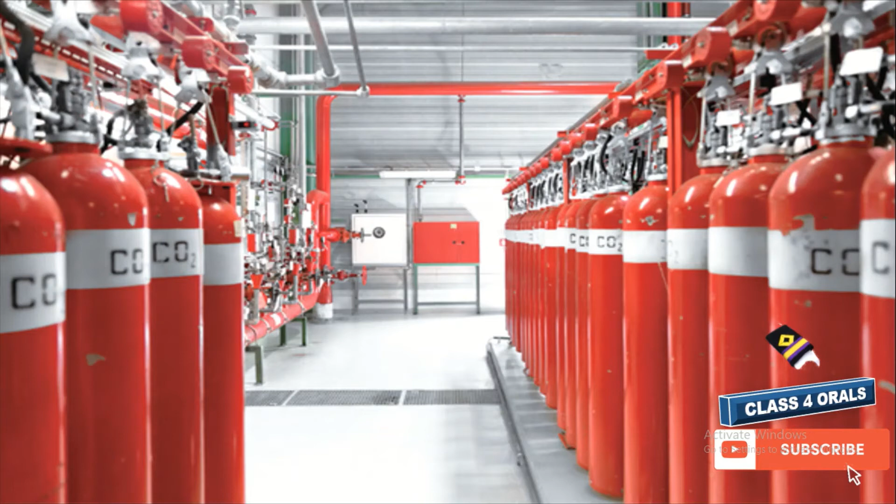Today we are discussing the fixed CO2 firefighting system maintenance and inspection as per the DG shipping. Please find the DG shipping circular link in the description below, because the video is going to be from this PDF.

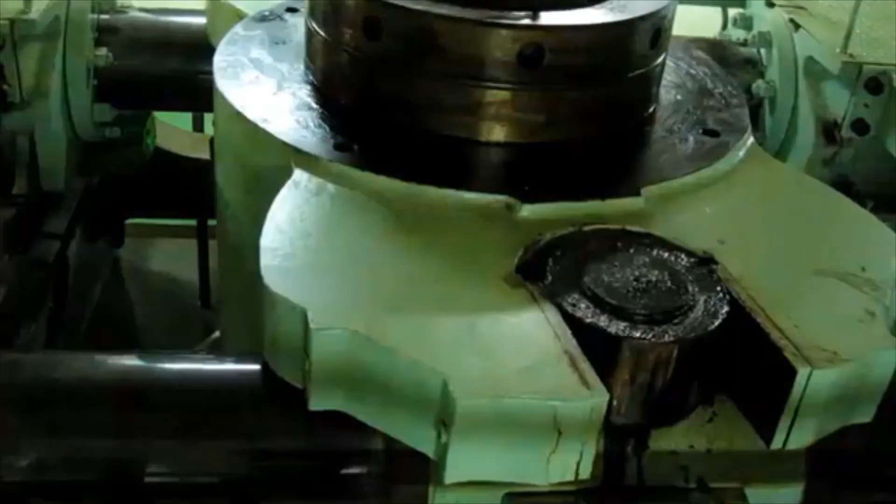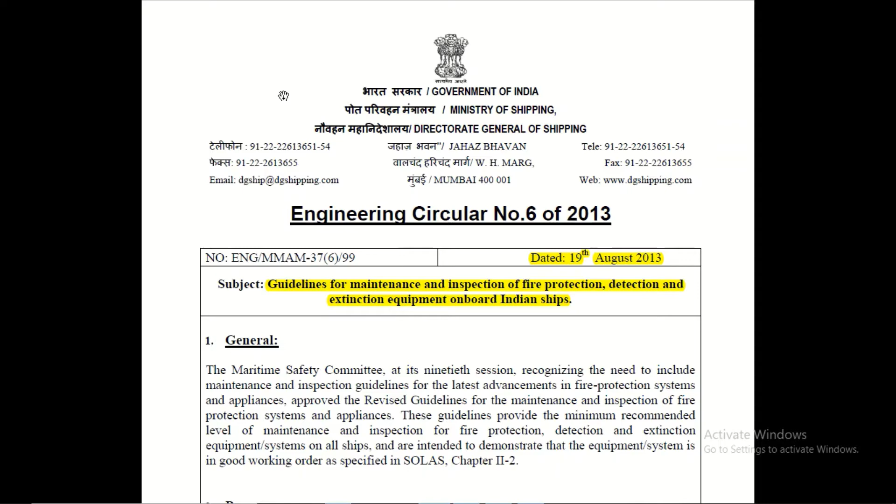Here we can see the engineering circular by the DG shipping dated 19th of August 2013. It reads the guidelines for maintenance and inspection of fire protection, detection and extinction equipment on board Indian ships. Please note this guideline is for the Indian ships because it is given by the DG shipping.

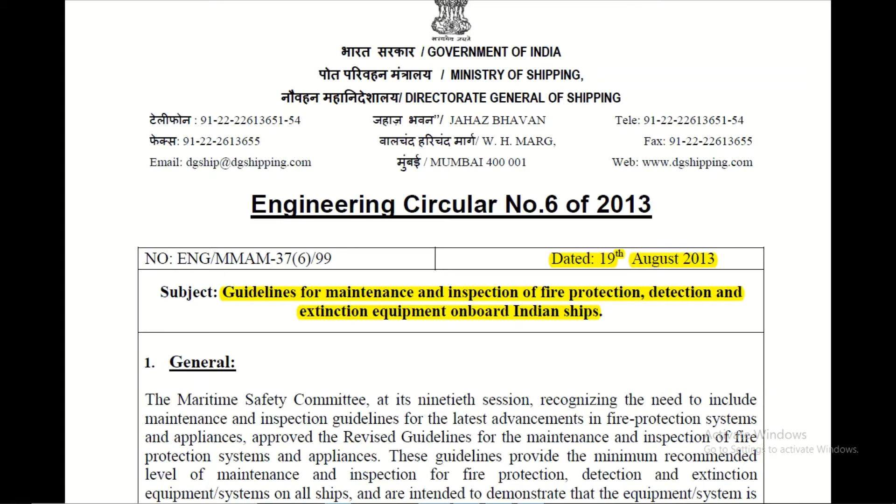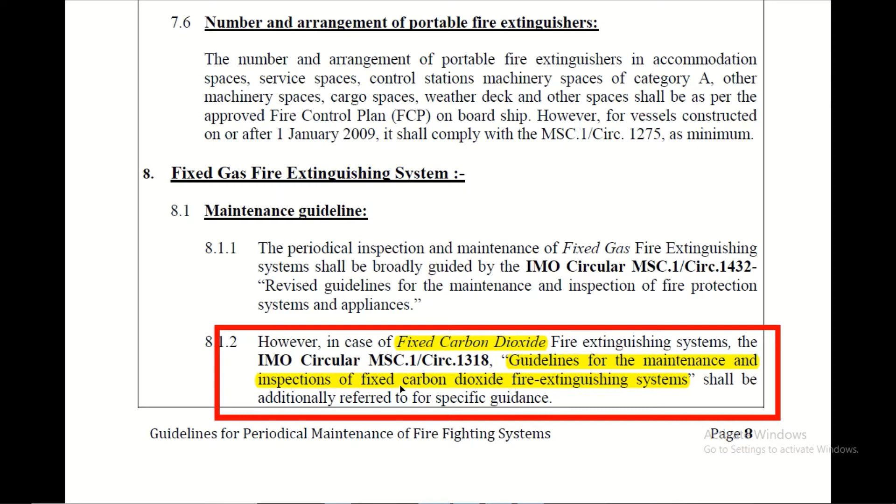So let's quickly discuss what are the points which DG shipping is saying us to follow for the fixed CO2 firefighting system. As we can see under section 8, that is for the fixed gas firefighting system, it comes under the IMO circular MSC.1 circular 1318. Again, I can read for you: the guidelines for the maintenance and inspection of fixed carbon dioxide fire-extinguishing system shall additionally be referred for the specific guidance.

So let us quickly discuss what are the weekly, monthly, quarterly and annual inspection and maintenance. First point says, under these maintenance, there shall be assurance that for all the systems of fixed gas fire extinguishing system, including the fixed CO2 system, there should be approved maintenance instructions that should be performed by the competent crew members.

There should be competent crew members performing the maintenance and not the junior or trainees. The second point says the additional periodic inspections and maintenance under circular 1318 shall be undertaken by persons specially trained and under authorized service agency of the CO2 systems only. Suppose you have a Unitor CO2 system, then the periodic inspections and maintenance should be done by those people under the Unitor fixed CO2 systems.

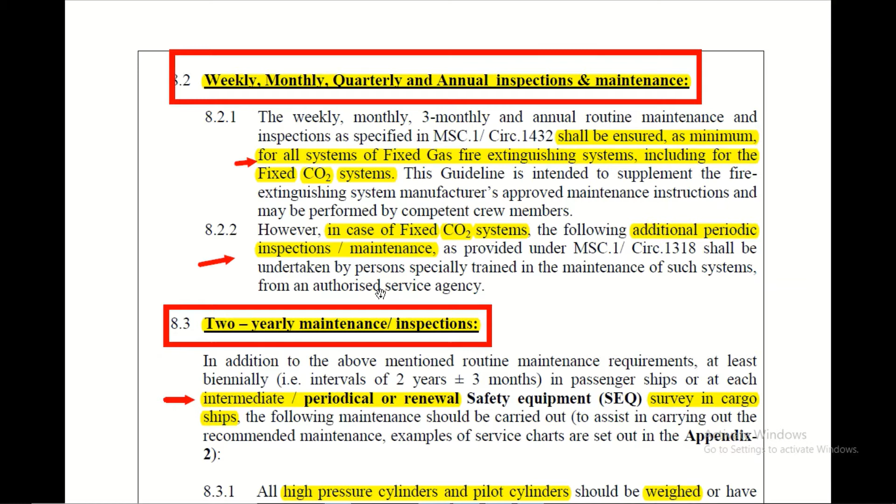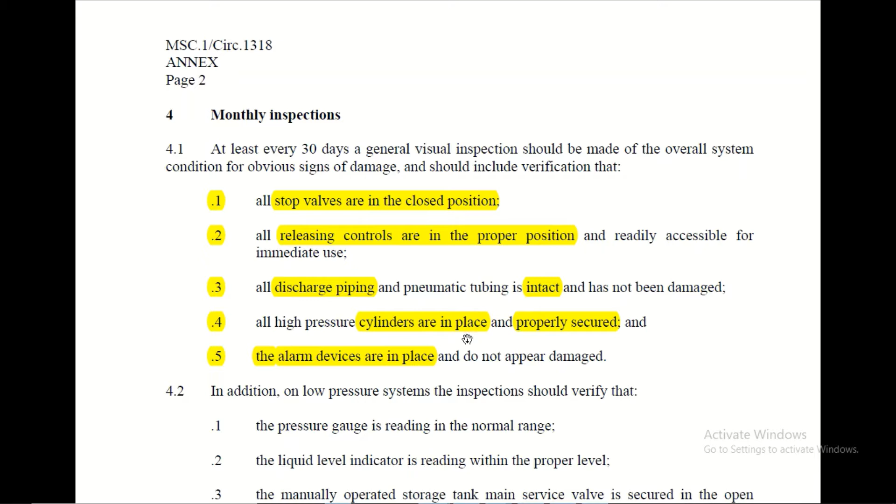This is IMO MSC circular 1318 which we have talked about just now. It has the monthly inspection list that every 30 days a general visual inspection should be made. The first point is all stop valves should be in the closed position. All releasing controls are in proper position. All the discharge piping and pneumatic tubing should be intact and not damaged. All high pressure cylinders are in place and properly secured by the clamps. All the alarm devices are in place.

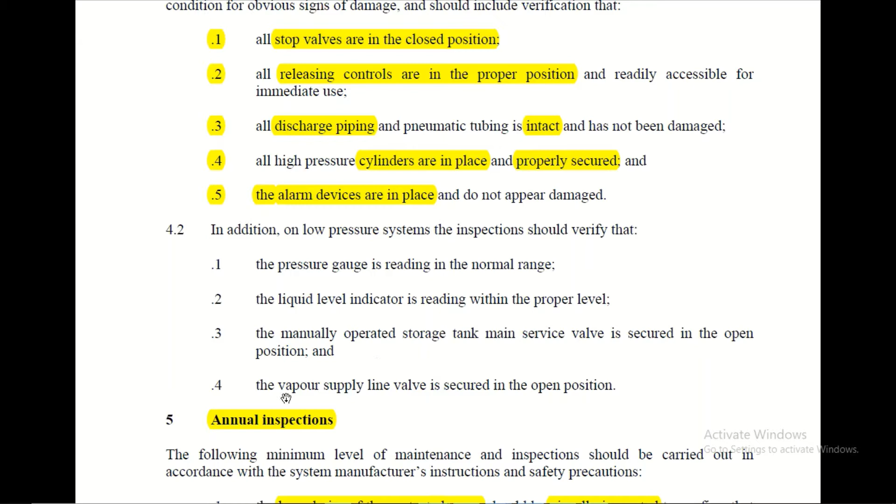Apart from that, the low pressure CO2 system has to be checked with the pressure gauge reading in the normal range. The liquid level indicator should be in the proper level. The manual operating storage tank service valve should be in the open position. The valve vapor supply line should be in the open position.

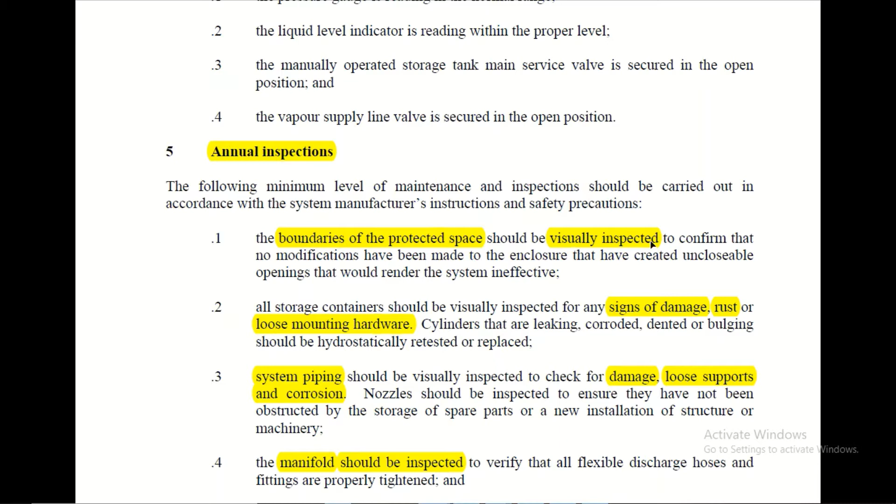The annual inspection includes the boundary of the protected space should be visually inspected to confirm that no modification has been made to the enclosure.

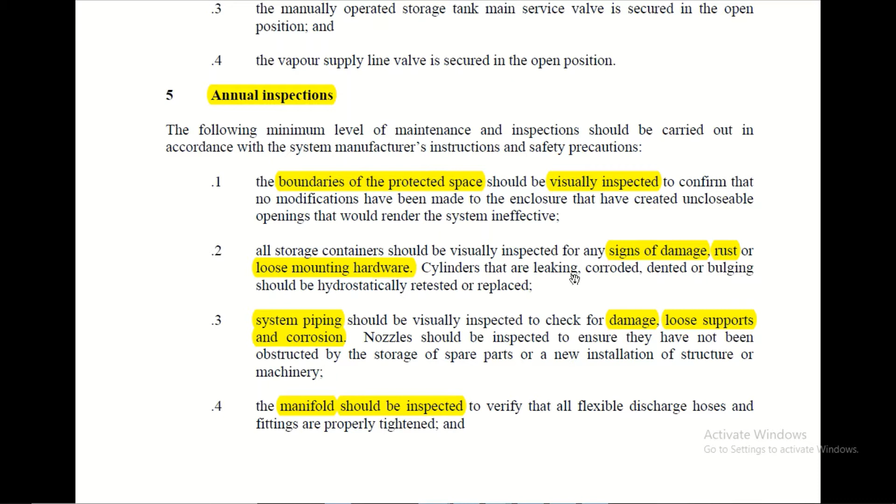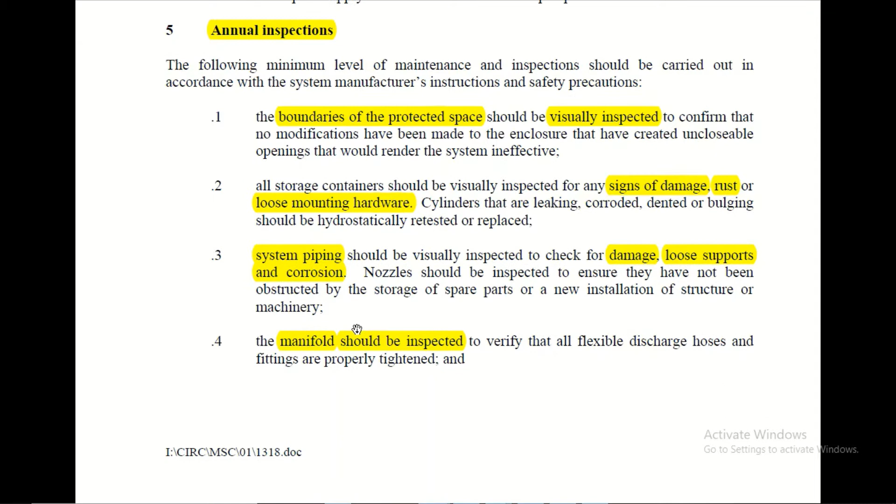Second point is, the visual inspection should be carried out for any kind of sign of damage, rust or loose mounting hardware. The cylinder should be checked and properly tested for any kind of corrosion or dent or bulging in the cylinder. The piping system should be visually inspected for damage and for any kind of loose supports or corrosion or loose foundation. Fourth point is the manifold should be inspected and the tightening and the fitting should be checked.

And lastly, the entrance doors to the protected space should be closed properly and they should be opened outwards, and they should have a warning sign which should indicate that the space is protected by the CO2 system and the personnel should evacuate immediately if the alarm sounds, and this should be properly mentioned in the clear operating instructions.

The one question here is that the entrance doors should be opened outwards from the CO2 room and not inwards, so that the person can evacuate immediately if any kind of alarm has sounded.

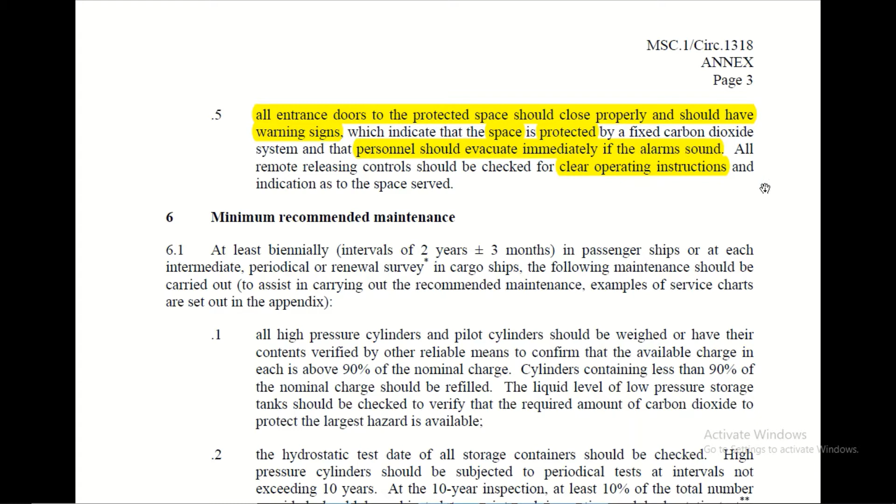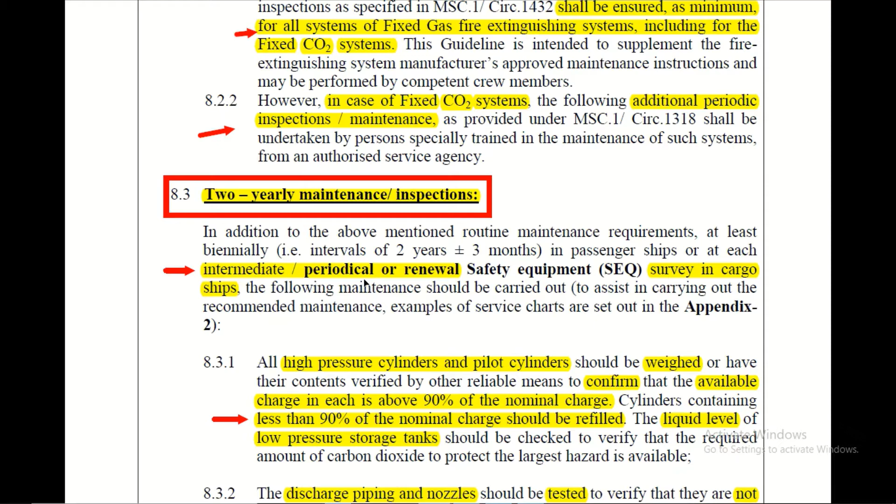Next, the 2 yearly maintenance inspections. As the name suggests, the 2 yearly maintenance is going to be on a longer basis, and it says it should be performed at intermediate, periodical or renewal survey in the cargo ships. We are not focusing on passenger ships currently, but on cargo ships, the 2 yearly should be conducted at intermediate survey, periodical or renewal survey as per the SMS of the ship.

The inspections and maintenance include the very important content of the CO2. All the high pressure cylinders and the pilot cylinders should be weighed, and we have to confirm that the charge available in each cylinder should be above 90% of the nominal charge. If any cylinder is having less than 90% of the nominal charge, then that should be refilled.

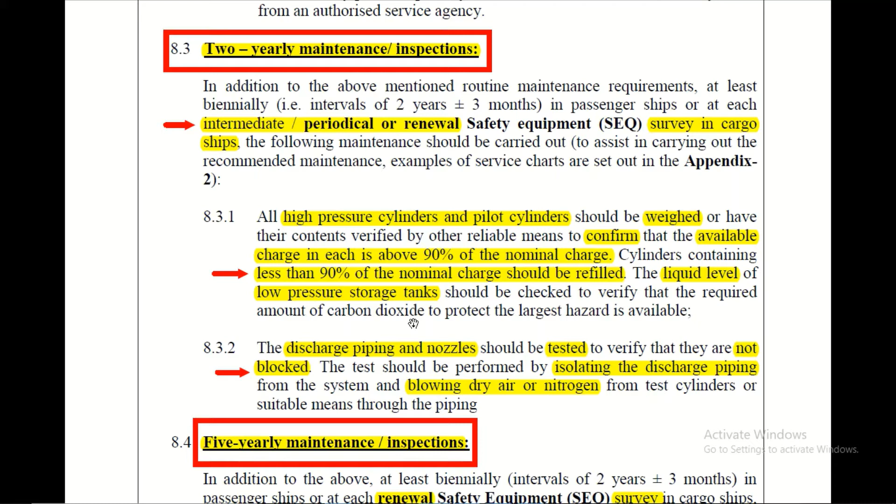Now, for the CO2 systems which are low pressure CO2 systems, the liquid level should be checked to verify that the CO2 amount should be able to protect the largest hazard available.

Second point in the 2-yearly maintenance says the discharge piping and nozzles, which is very important for the high pressure cylinder apart from the casing, should be tested to confirm they are not blocked. There should not be any kind of blockage in the piping or the nozzle, and the testing of those should be done by isolating the discharge piping and blowing dry air or nitrogen from the test cylinder as per the manual, whatever the maker says. So we have to check the blockage of the discharge piping and nozzles also.

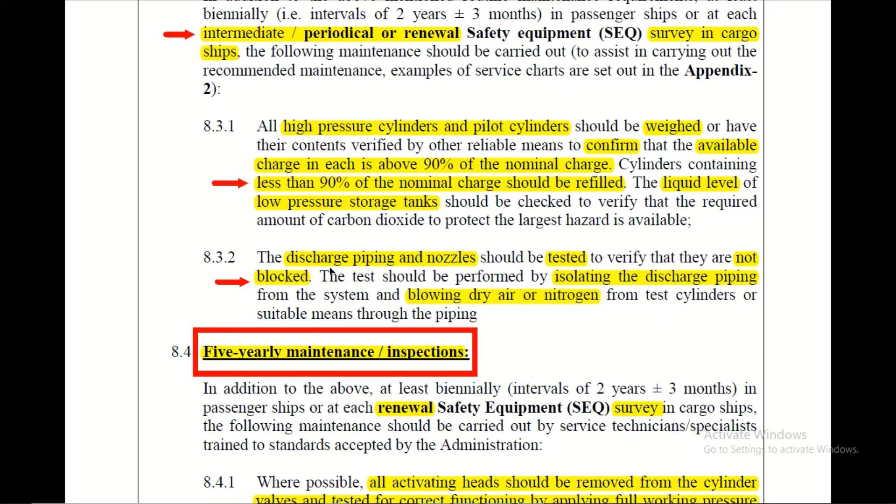Next, the 5-year maintenance. The 5-yearly maintenance has to be conducted at the renewal survey in the cargo ships. In this maintenance, there is an additional maintenance taken care of for the activating heads.

The activating head should be removed from the cylinder valves and tested for correct functioning by applying full working pressure through the pilot lines, and we have to activate and remove the activating heads.

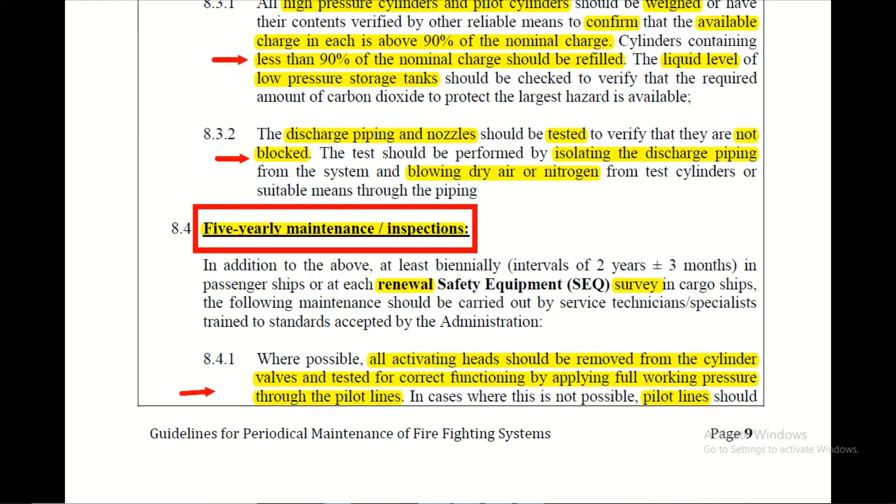In case this is not possible, then the pilot line should be disconnected from the cylinder valves and they have to be blanked off. We then test with the full working pressure from the release station and check for any kind of leakages from the activating heads.

In the older systems, which we can see in the McGeorge book, there is a manual pull cable diagram. If such a system is there, we have to operate the remote release control by the manual pulling method, check that the greasing of the pulleys is in good condition, and check that they are able to move freely. These points are basically the 2-yearly and 5-yearly maintenance points we are discussing.

Next, all the cable components should be cleaned, properly tightened and stiffened. If the release control is performed by pneumatic pressure, which is what we mostly have on ships now, I don't think most ships have the manual pull cable type system, but if the cable type system is there, the components should be cleaned.

If the pneumatic pressure operated release control is there, then the tubing should be checked for any kind of leakage, and the necessary charge for the remote releasing station pilot gas should be verified. The time delay, which is a very important component in the CO2 firefighting system, if fitted, should prevent the discharge of gas for the required time period.

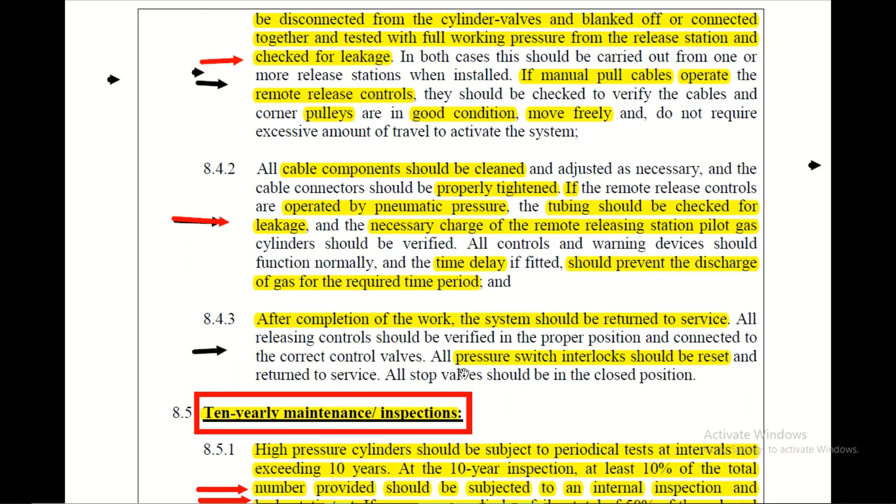After the completion of the work, the system should be returned to service, any pressure switches should be reset, and all the stop valves should be in the closed position.

Now we will discuss the 10-yearly maintenance and inspections. The high pressure cylinder should be subjected to a periodical test not exceeding 10 years. There is a mention of hydrostatic test, which is the internal inspection of the CO2 cylinder.

If one or more cylinders fail, then a total of 50% of the onboard cylinders should be tested. If further cylinders fail, then all cylinders should be tested, and subsequently the flexible hoses should be replaced at the intervals recommended by the manufacturer and not exceeding every 10 years.

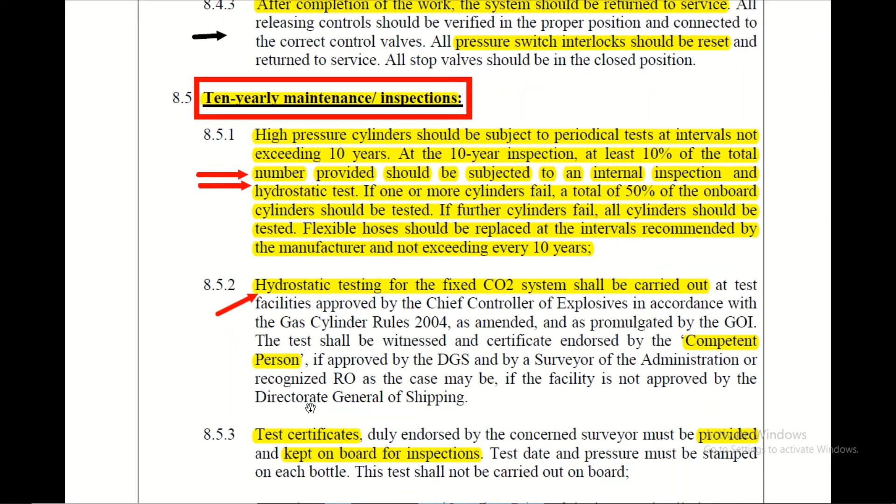Subsequently, the test certificates related to the hydrostatic testing and other tests have to be endorsed by the concerned surveyor and kept on board for inspection. In case of any inspection or vetting, they should be produced before the surveyors.

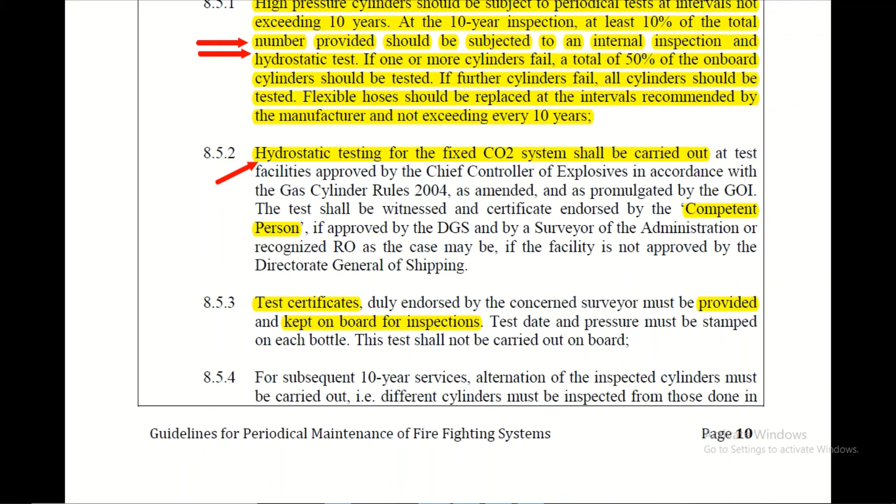Now, ships 10 years or older coming into the Indian flag will be required to carry out this test at the next scheduled dry docking.

All the flexible hoses should be replaced every 10 years, and they should not be kept fitted on the CO2 system. They should be replaced with new and fresh hoses, and all the discharge piping has to be tested to a pressure of the maximum working pressure. These are the additional points given by DG Shipping for the Indian ships.

Apart from that, we have other maintenance also. We have to check the condition of the CO2 room, check the foundation, check the opening of the door, check the positive closing of the door, and check that all the bottles are properly tightened, with no leakage or tampering on the hoses.

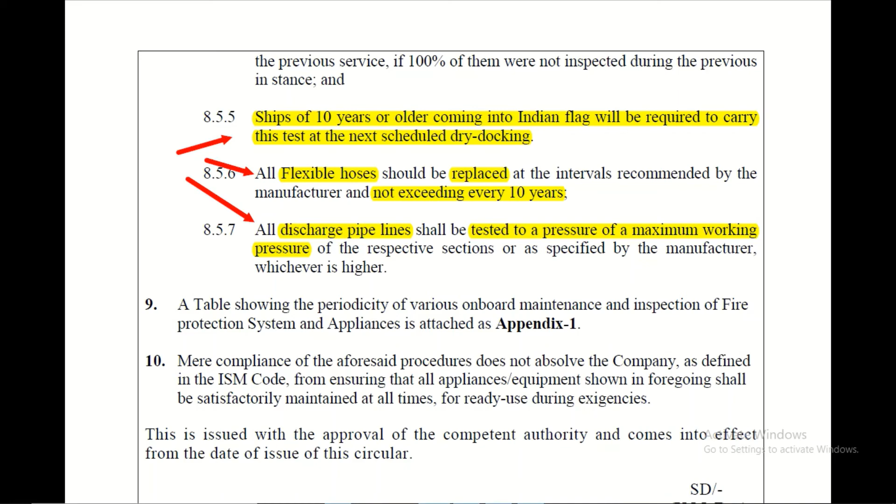These are the points which we can find very easily in the textbooks, but this circular has to be noted by the Indian ships following the fixed CO2 system.

Again, we have to mention Engineering Circular 6 of 2013, and you can find this circular PDF in the description, which you can download and have a quick review of fixed foam systems and other equipment also. Currently, I have made the video only on the fixed CO2 system, but you can have a look at the PDF also.

This video is very much helpful, and it has cleared the doubts regarding the weekly, monthly, 1-yearly, 2-yearly and 10-yearly maintenance on the fixed CO2 system, which is very much asked by the surveyor in the class or orals.